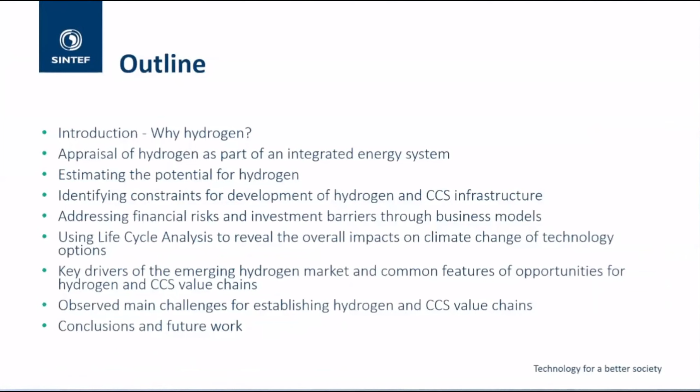So this is the outline of the presentation that I will give. For those of you who have already had a look at the paper, or those that want to read the paper afterwards, you will see that the structure of my presentation is quite one-to-one with the structure of the paper itself.

Before I dive into the main results, I thought it would be good to take one step back and contemplate a bit on why hydrogen, and why does hydrogen play a central role in the energy system. So why is hydrogen useful?

The starting point for this we find in the Paris Agreement that was reached back in 2015. There, the nations agreed to pursue efforts to limit the temperature increase to 1.5 degrees Celsius above pre-industrial levels. This spurred the special report from the IPCC on global warming of 1.5 degrees Celsius.

This report highlighted in a very clear way that the avoided climate change impact on sustainable development, eradication of poverty, and reducing inequalities would be greater if global warming were limited to 1.5 degrees Celsius rather than 2 degrees. So it highlighted the significant benefits of being able to limit global warming to 1.5 degrees Celsius, and it also highlighted that if we are to do so...

...we need to reach net zero emissions around 2050. This changed the scope and the mindset of a lot of industries and also governments. Because before this point, one was considering reaching 80 to 95% greenhouse gas emission reductions by 2050. And the sectors and applications that were the hardest to decarbonize would, in this regime, plan for being among the few that were able to emit greenhouse gas emissions.

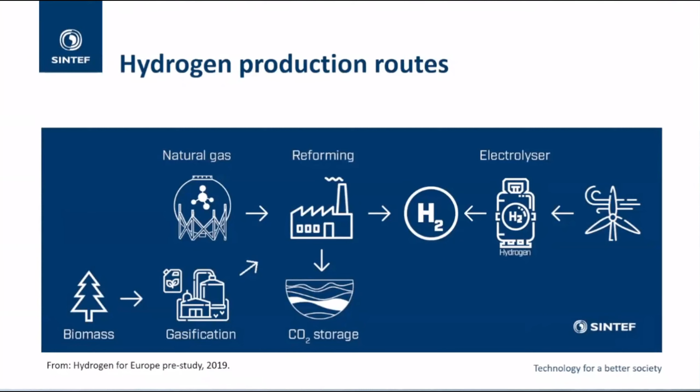What we saw in the case studies that we have undertaken, and from which this paper is based upon, is that appraisal of hydrogen as a part of an integrated energy system has many facets and many challenges that need to be investigated and taken further to fully select an optimal configuration for the hydrogen value chains.

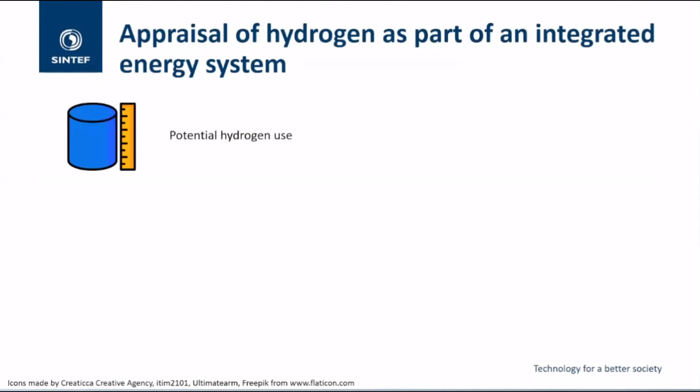First of all, we need to understand how much hydrogen can be used, where will it be used, and when will it start to be used? So how do we need to build up the hydrogen market to serve the end sectors that will need hydrogen?

Secondly, hydrogen and CCS chains involve quite some infrastructures that are heavy investments but with long-term benefits. So it's important that we plan the infrastructure development well, both in terms of costs and also how we phase the investments to best suit the end needs that we have.

We need to develop sound business models to make sure that these projects will be established. And we also need to sort all legal aspects such that investors and companies are willing to invest into the hydrogen value chain and contribute to making sure that it happens.

We also need to understand that hydrogen, because it needs to be produced, is not an energy source. So we need to understand the full environmental impacts of the production of hydrogen and how it is used in the end use applications, to ensure that we reach the greenhouse gas emission reduction targets that we have set.

Then, of course, we need to make sure that all safety aspects of hydrogen and the use of hydrogen have been taken care of and are secured, and also that the societal aspects are addressed in each of the projects, such that the hydrogen value chains will be a harmonized part of the energy systems.

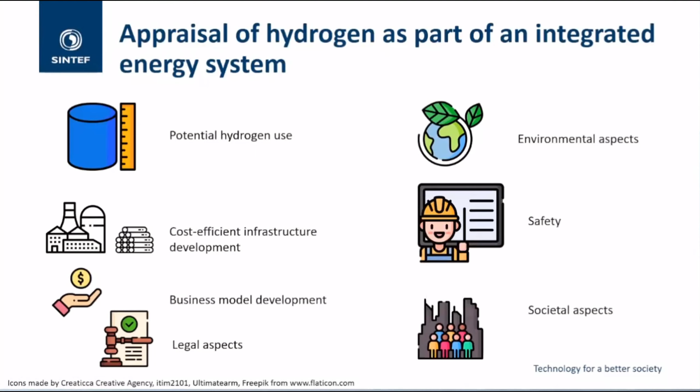So the results that I will present today are focusing primarily on the first five issues, and I will start with the estimation of the hydrogen potential. I'll show you three different examples of how this has been done.

There is no final answer to how one should do this, but rather we want to highlight that there are different ways of doing this assessment, and they all have different strengths and benefits.

So the first case here is from a study into the decarbonization of the Rotterdam port area in the Netherlands, which is a very energy intensive area with oil refining, petrochemical, and also power generation as the core parts in this industrial cluster. Here, hydrogen is attractive for high temperature processes.

In the evaluation work, when seeing the potential for hydrogen, one saw that the hydrogen demand profiles strongly depend upon the details of the upgrading of this industrial cluster. So each high temperature furnace, for instance, that would be upgraded would lead to a significant step up in the demand for hydrogen.

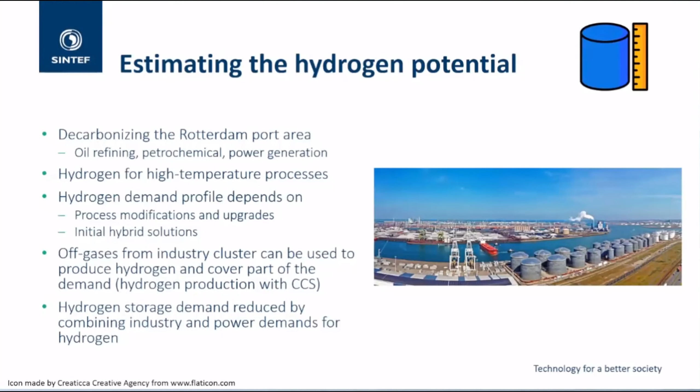Next, I will move on to a second approach, and this particular one was used on the decarbonization in Germany. One looked into the three different sectors of industry, transport, and district heating networks, primarily heating the building stock in Germany. And one looked into how this would develop towards 2035 and beyond.

So this was a quite detailed study that went in detail into all these three different sectors. And as you can see on the right-hand side as well, it was undertaken for what is called NUTS 3 regions for Germany, so quite high geographical resolution within Germany.

So for the industry sector, steel production was specifically focused upon, as this is a significant industry in Germany, and also because it has significant potential to use hydrogen as a feedstock, as a reduction agent within the production process itself.

For the transport sector, a distribution factor based upon localization data was established to assess the share of cars, buses, trains, and trucks that potentially could be fueled by hydrogen in the future. This localization data consisted of the current fleet numbers, mileage or passenger volumes, fuel consumption, the share of diesel vehicles, population density, federal financial aids, gross domestic product, and the income of consumers in each of these regions.

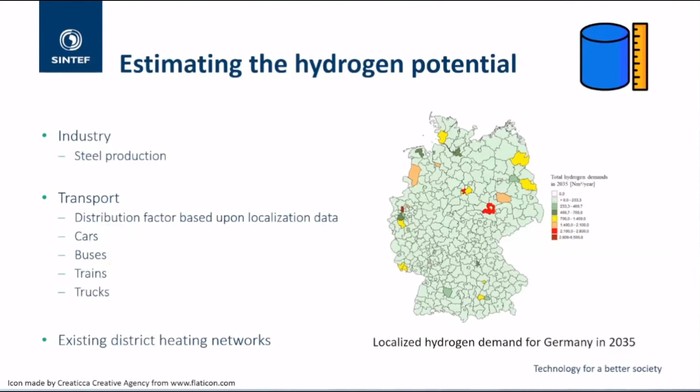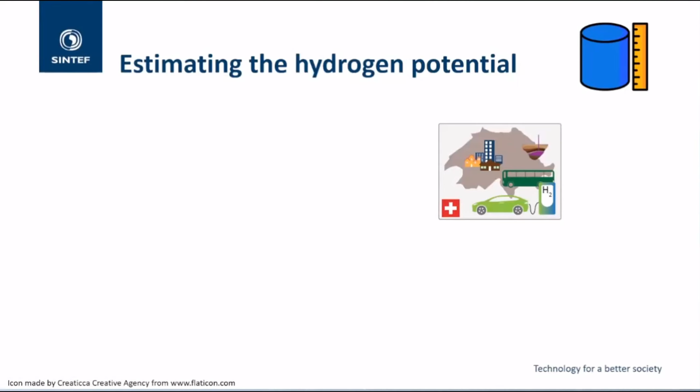A third approach was undertaken in a case study that encompassed the entire Switzerland. In this specific study, one wanted to analyze how the entire energy system of Switzerland could reach net zero by 2050. To this end, one used an energy system model that includes descriptions of all the relevant parts of the energy sector, so as a result, one could see the cost optimal routes for reducing the CO2 emissions.

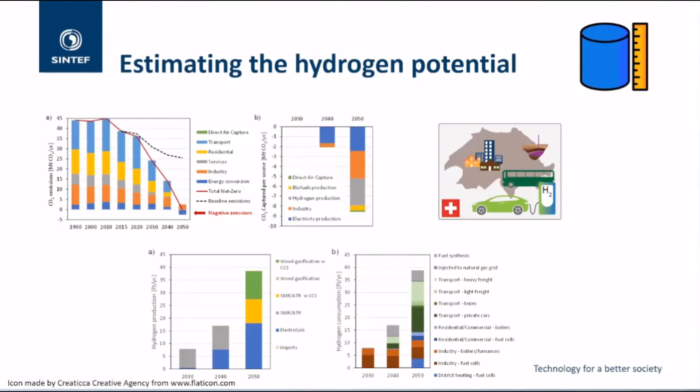It starts out in 2030 being primarily used in the industry sector. Then as one moves towards 2050, the transport sector becomes more important, and by 2050, it's the most important sector for the use of hydrogen.

Then I will move on to the next topic, which is cost-efficient infrastructure development. And I'll show you two different examples.

This first example comes from a case study on how to decarbonize the domestic and non-domestic heat in the UK. To this end, an optimization model was used that can optimize the deployment of hydrogen as well as CCS infrastructure, both for production, transportation or distribution, and also for storage.

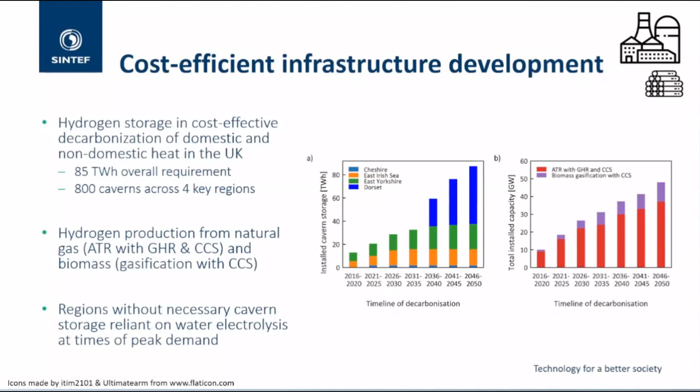The second example that I will show you comes from a study on how to bring hydrogen into the German energy system based on Norwegian natural gas.

Here, hydrogen is produced from natural gas that stems from the Norwegian continental shelf, and the produced CO2 is captured and stored permanently on the Norwegian continental shelf.

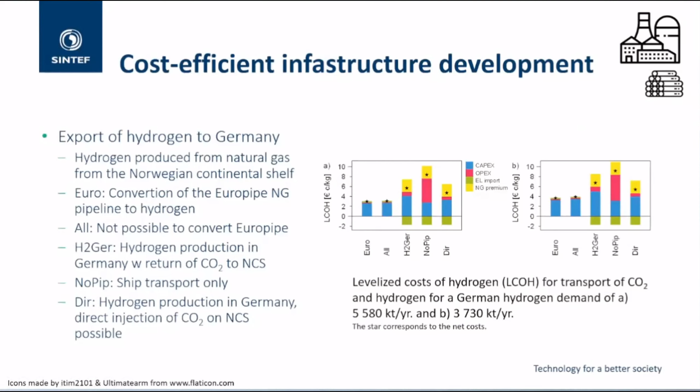Let's move on to the business development side, since this is a significant part of establishing hydrogen and CCS value chains. It is important to address the financial risks and investment barriers through establishing business models.

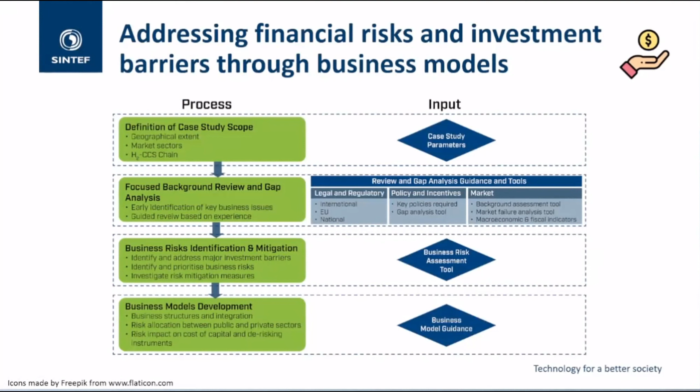As I said earlier, we integrate hydrogen into our energy systems to achieve full decarbonization of the energy system. So it is of high importance that we ensure that the hydrogen we produce will give us the reduced greenhouse gas emissions as sought. To this end, life cycle analysis was used within the studies to reveal the overall impact on climate change of the technology options available for hydrogen production.

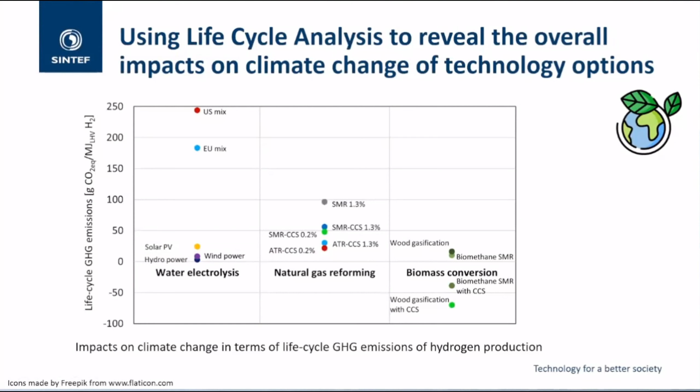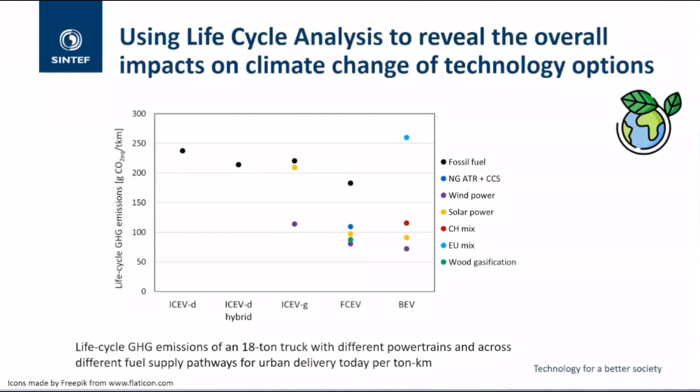I'll shortly summarize and give you an overview of the drivers of the emerging hydrogen market across these case studies. I'll show you the common opportunities and also give you an insight into the main challenges related to establishing these hydrogen and CCS value chains.

Now, I've given you glimpses of the case studies, but before I go on, I thought I would give you a brief overview of them, for your sake of completeness. The UK case study consists of assessing how to decarbonize UK cities and industrial clusters. It focuses on decarbonization of domestic and non-domestic heat, and was closely related to the H21 North of England roadmap, a work undertaken at the same time these case studies were made.

The German case study focuses on an overall level on how to decarbonize the gas infrastructure in Germany. It assessed possibilities for blending hydrogen into the existing natural gas network, the possibility of establishing a dedicated hydrogen backbone, and also the possibility for establishing a CO2 transport network to transport CO2 towards the Norwegian continental shelf for permanent storage.

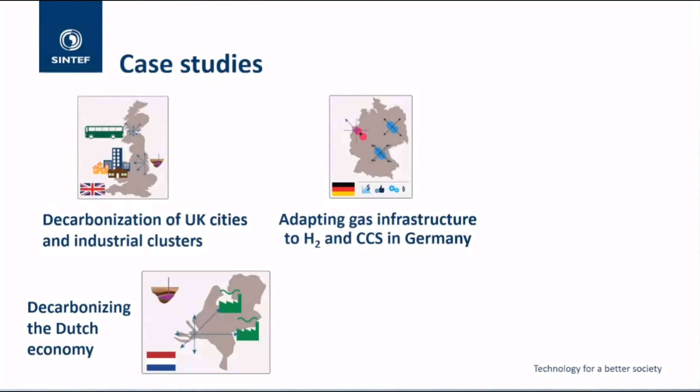The Dutch case study focused on how to decarbonize the Dutch economy using the Rotterdam port area as a starting point, but then also going beyond and assessing the impacts of wind power and the possibility to produce hydrogen from wind power.

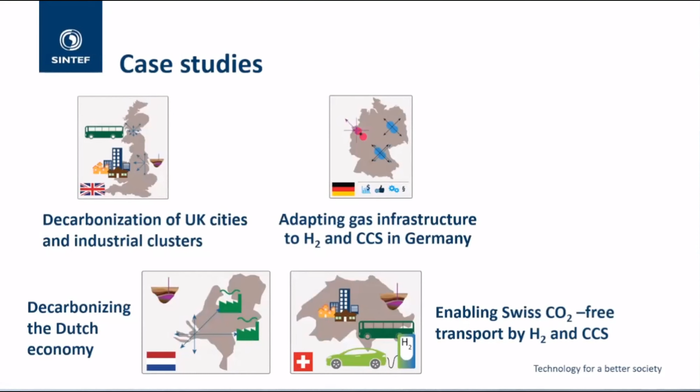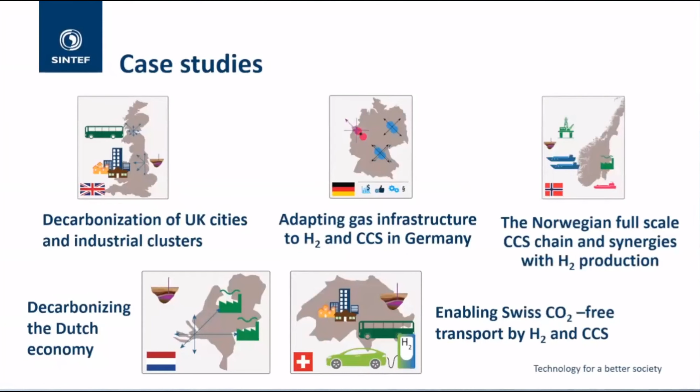Then we have the Swiss study that looked into how to decarbonize the entire Switzerland and reach net zero emissions by 2050, and particularly also how to provide CO2-free transport in Switzerland. And finally, we have the Norwegian study that looked into how the Norwegian full-scale CCS chain could give synergies with hydrogen production, and how hydrogen could be produced for export to Europe and also globally.

So then to look into the key drivers of the emerging hydrogen market: what we saw is that the industrial demand for decarbonization was a key driver in all of the case studies. The industrial demands are quite significant in volume, which will also bring the hydrogen chains being established to full scale, which in turn gives the possibility to reduce costs by scaling up.

In the UK, as I mentioned before, decarbonization of domestic and commercial heating is a central driver. This is because of the significant share of buildings connected to the existing gas network, and it is a sector with large needs for energy storage and flexibility to accommodate seasonal variations. In this perspective, hydrogen becomes particularly of interest.

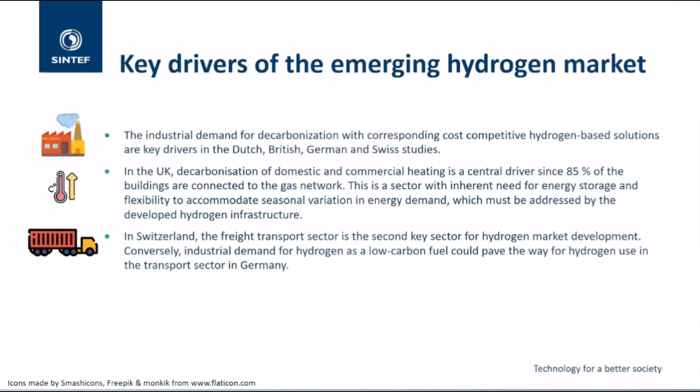In Switzerland, the freight transport sector is the second most important sector for hydrogen market development, while this was different in other countries, for instance in Germany, where the transport sector would benefit from a hydrogen value chain being established.

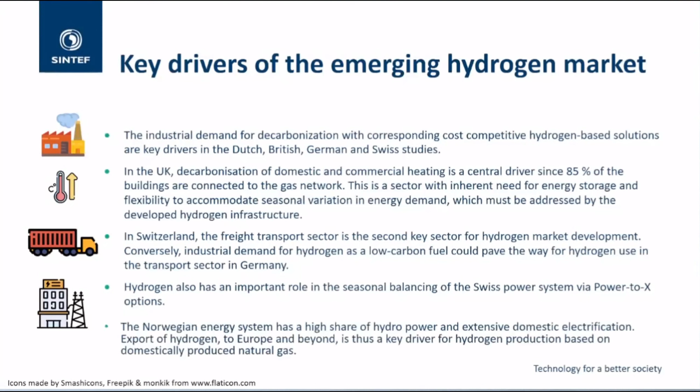One also saw that, for instance in Switzerland, hydrogen played an important role in the seasonal balancing of the Swiss power system. And for the Norwegian case, the export option is the driver for hydrogen production.

While undertaking these five studies, we also saw common opportunities in these emerging hydrogen markets. First, since the industry sector is the main driver on the hydrogen demand side, one needs hydrogen production that can scale up fast enough to meet demands. Where you have natural gas available, hydrogen production via natural gas reforming with integrated CCS would provide this option. You can scale up fast enough and also contribute to bringing down costs, both for infrastructure that can be fully utilized because of the full scale of production and use, and also for the rest of the hydrogen and CCS value chains.

We saw that we need carbon dioxide removal technologies, which mainly need the possibility to permanently store CO2 that has been captured either from air or from biomass. When you establish integrated hydrogen and CCS infrastructures, you also provide an easily accessible pathway for transporting CO2 from carbon dioxide removal technologies to storage sites where the CO2 can be permanently stored.

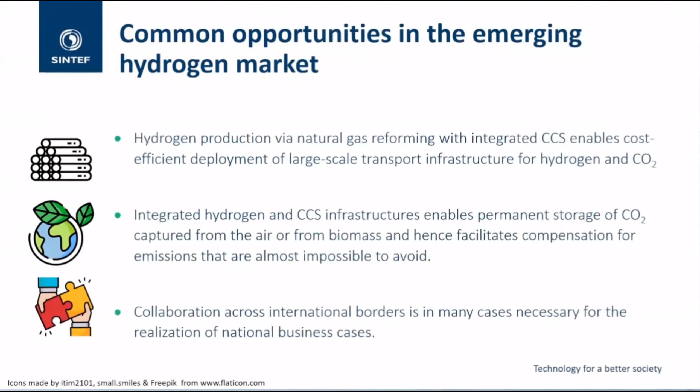Then to close with a little bit on the challenges for establishing hydrogen and CCS value chains, because these are technologies that need significant scaling up and significant deployment rate to be able to establish a value chain as desired.

We see that the main challenges are related to how to develop and initiate the hydrogen market. This will require government intervention, both at country and EU levels here in Europe, and for European countries it's of course important that these are coherent.

We also see that hydrogen is attractive in a net zero framework, and therefore it's important that there is coordinated planning, governance, and decision-making frameworks to both establish net zero policies and invest in infrastructures for hydrogen and CO2 that can help reach the targets. And finally, an EU-wide effort in Europe is needed to simplify the legislative pathway for hydrogen and CCS value chains.

So to summarize, we have seen that it is highly beneficial if we are able to limit global warming to 1.5 degrees Celsius, and then we need to reach net zero greenhouse gas emissions by 2050. Hydrogen becomes very attractive within this framework because it can decarbonize emissions that are hard to electrify.